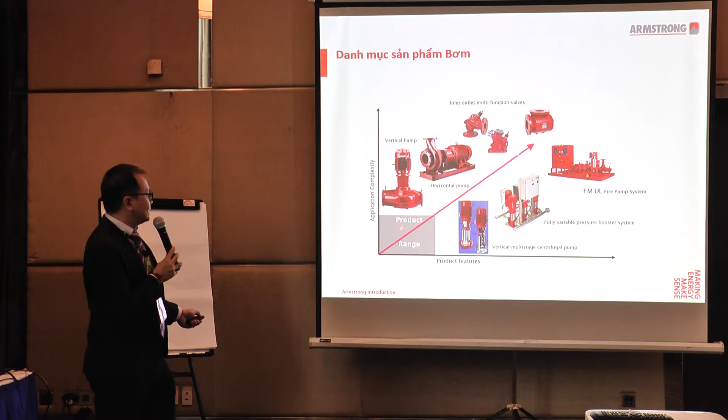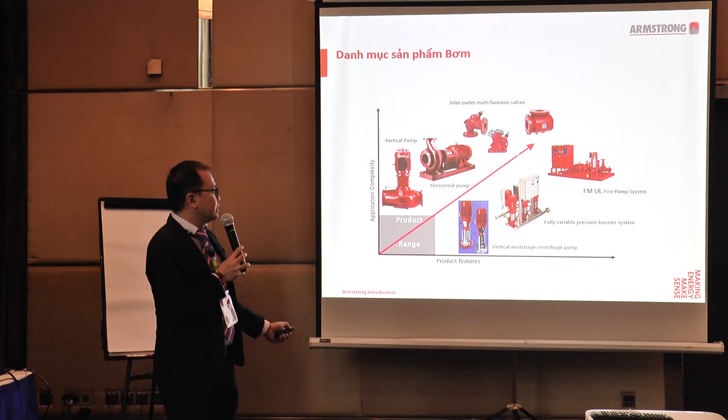So a little overview of our product solutions in terms of the pump portfolio. When we look at our various product ranges, they increase in functionality and capability, from very basic standardized horizontal pumps and suction pumps to vertical inline pumps with accessories such as multifunctional valves and suction guides, and also integration into booster sets, as well as a full system solution.

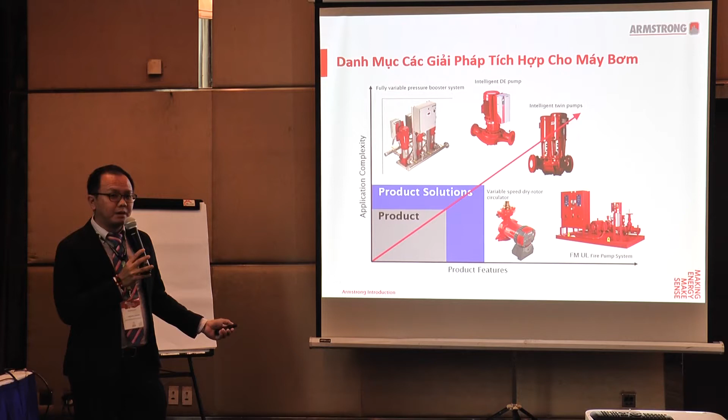So when we talk about integrated solutions, it's not just the mechanical side, which is the pump, but also the control side. You can see we started to integrate the controls, a standalone VFD, which we were able to enhance into what we call Design Envelope. From Design Envelope, we're able to incorporate further with intelligent twin pumps and a full system. So with a product that comes with a solution, naturally we enhance this with the system solution as well.

So when we talk about system, it's really a full solution from the very fundamentals of your mechanical to your electrical and your overall plant control. We can provide you with a more integrated distribution system, as well as chiller control or a full plant room system solution.

So really, this Armstrong portfolio is a journey, providing you with a solution from a product standpoint all the way to full optimization capability. That means an entire plant room system control. With this, you can see how it helps you increase your system efficiency and overall capability.

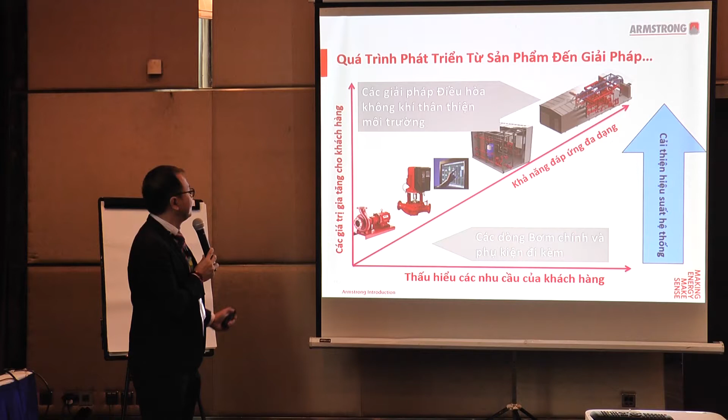So when we talk about our core competencies, of course fluid control is one of them, but also our expertise in HVAC, which is heat transfer, and we are able to couple that with the control system in terms of variable speed and demand-based control, which leads us to provide you with integrated solutions. These integrated solutions range from single, more modular ones to heavily integrated solutions. Essentially, this provides you with optimum building performance management and control.

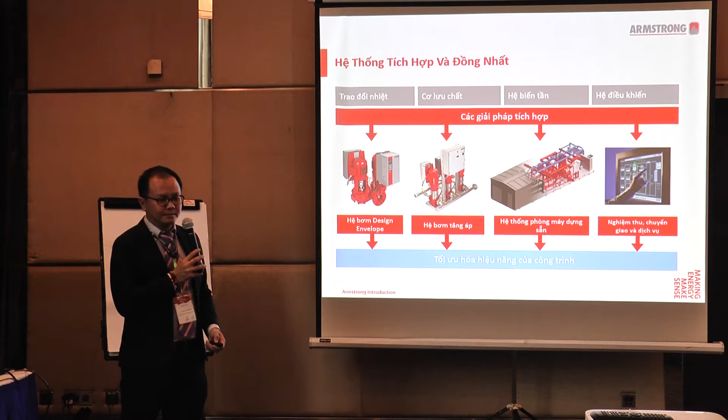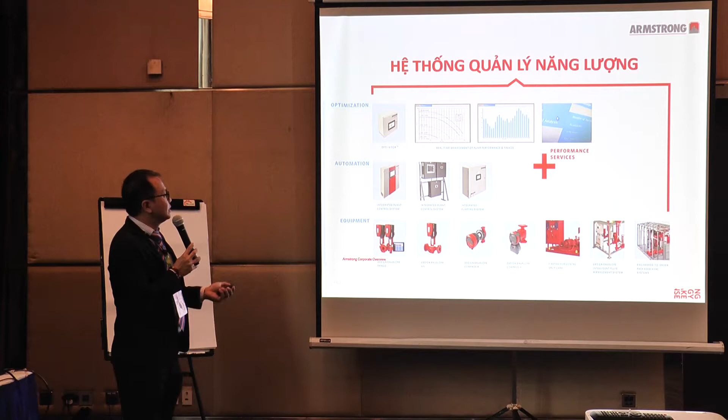So when we really talk about optimal performance management control, we're really talking about optimization. Now, a lot of people will understand, when we talk about plant optimization and also automation-wise, right? It's really about how you are able to first assess your operations on a real-time basis, as well as be able to enhance the performance of your plant. So you want to make sure that not only you're sustaining the performance, but you're actually able to improve as well over time. So this is what we call the performance management.

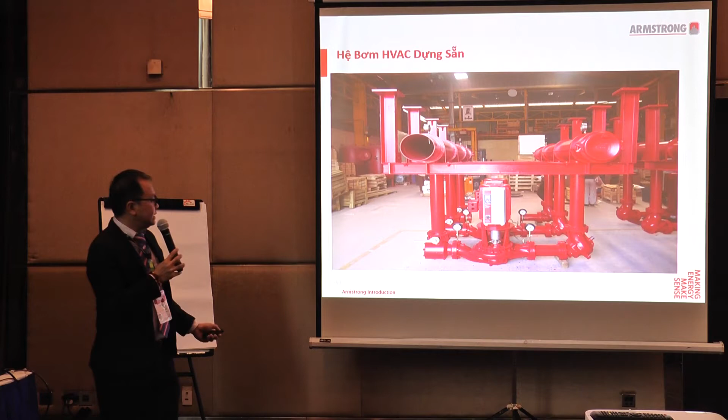So just some pictures to show you the different packages that we offer in terms of the HVAC that you can see here, as well as a big solar power project that we developed for the Middle East. Okay, thank you very much for a quick overview of Armstrong.

Thank you, Mr. Wesley. So next we invite Mr. Chris Han to present about the Armstrong solution. Hi, my name is Chris and I'm in charge of Southeast Asia. So today's topic is on challenging the traditional approach to HVAC system.

So during this section of mine, I hope that you can take down some notes because perhaps there are some new concepts that you will be exposed to, and I hope in my next visits to see you personally, visit you at your office so that we can explore some of these concepts that are going to be shared over the next few slides.

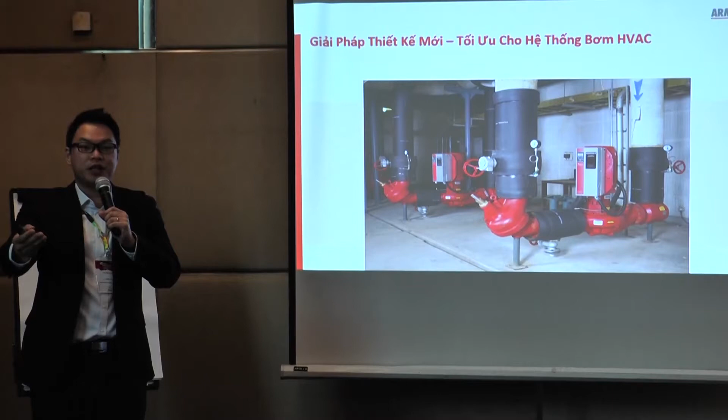Yeah? If you see also on the right hand side here, that is what we call our Design Envelope integrated drive, where we integrate our inverter together with our pump. Within this integrated drive, we do have a flow meter functionality, and this gives you accuracy of ±5% of the BEP flow rate, best efficiency point flow rate. And this is actually much more accurate compared to the flow meters in the market, which are typically around ±10%.

And after you have installed all your equipment, we know that a well-balanced system is very, very important. A well-balanced system is very important because this will actually influence your efficiency, your plant room efficiency, as well as your reduction in operating cost.

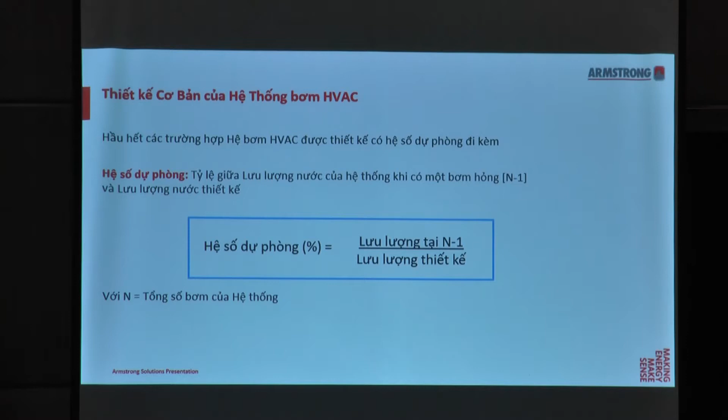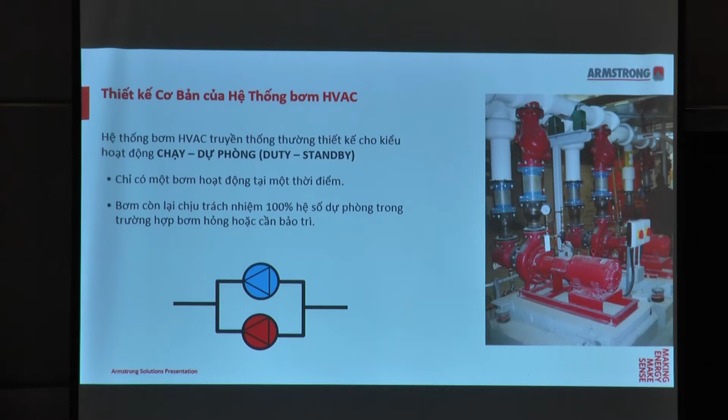And I believe in some of your existing designs, as engineers, consulting engineers or designers, you basically have your pumping system designed as a duty standby. Am I right? As you can see here, this picture looks very familiar to you. You use a traditional end suction pump with one of the pumps operating at one time and the other on standby, giving you 100% redundancy in case of a failure or a maintenance requirement.

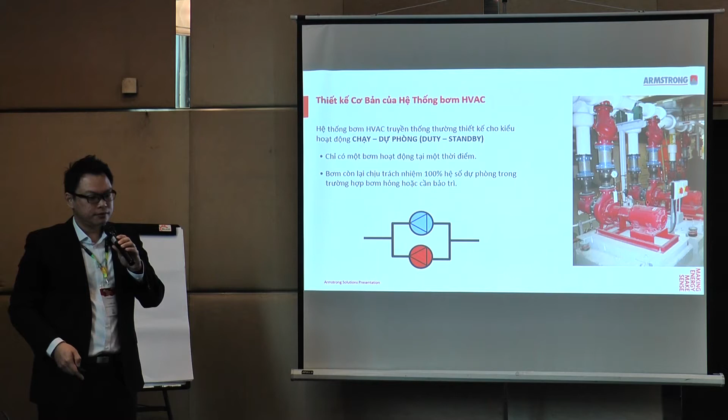The second concept I want to share with you, and again, you would have known, the HVAC industry is basically a part load industry. That means we are not operating at 100% of the design demand at all times of the day. Correct? If you were to do statistics over time, I would say that 90% of the time we are only requiring 60% of the load. So what this means is that when we size our pumps for part load, we can actually select smaller pumps to handle these lower flow requirements.

Follow? So when you have two smaller pumps in operation, and if one pump fails, we'll still have sufficient redundancy or backup, and this backup will be able to handle the flow whenever this failure occurs. And over here in the box, you will see that unlike other equipment like boilers or chillers, the pump's redundancy is not a 1-to-1 ratio. It's not determined by the number of pumps.

A concept that I want to share with you is capacity split, and this becomes useful when there is a multi-pump system. In this case, I'm going to consider two pumps with a design flow of 19 liters per second. If we consider a 50% capacity split with two pumps running, each pump will have 9.5 liters per second. If you have a 2 times 70% capacity split, each pump will have 13.3 liters per second. And what if you size your pump for a 2 by 100% capacity split? That means you have a duty standby configuration, or you can operate in parallel.

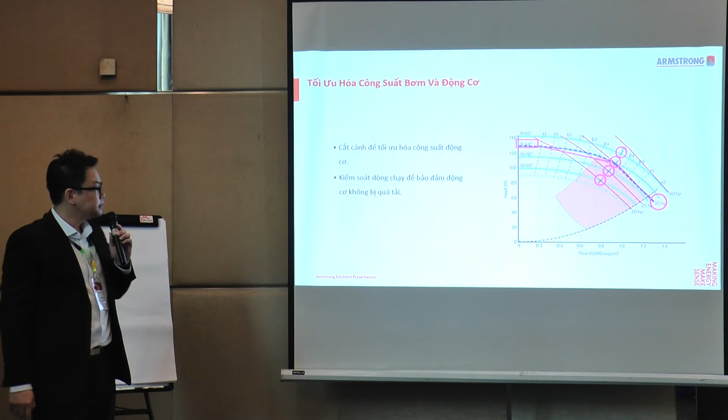Next, this is something you may find interesting, because I believe not all manufacturers use this approach. If you can follow along, on the y-axis I'll choose a point of 90 feet of head, and on the x-axis I'll put it at 900 GPM. So if you follow this graph, basically what you get is at this spot here.

If you see the spot here, if you have a requirement of non-overloading, you'd want to use the 25 horsepower, but your end of curve will exceed the motor horsepower curve. So what do you do? You have to go for the next size, which is 30 horsepower. If you realize, the 30 horsepower intersects the 11.44 inch impeller size.

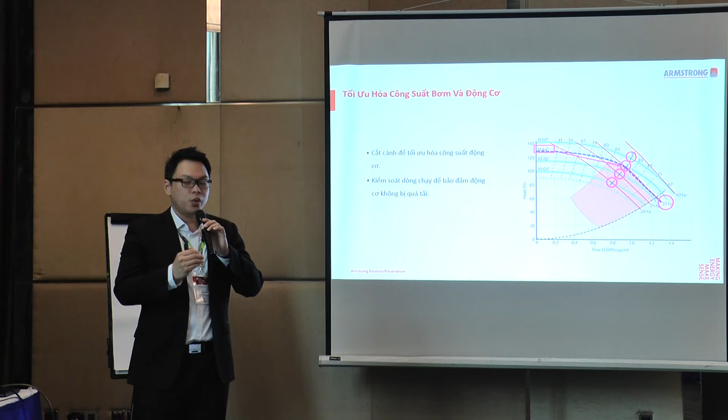So for us at Armstrong, since we're already going to use the 30 horsepower motor, why don't we optimize the impeller trim? Instead of using 10.78 inches, why don't we use 11.44 inches? What does this give us? It increases our operating range available.

So what's different is that our operating portion goes along the head curve, and follows the motor horsepower curve straight down to ensure there is no exceeding of the horsepower curve. So again, the first sentence: impeller trim is optimized to the motor power.

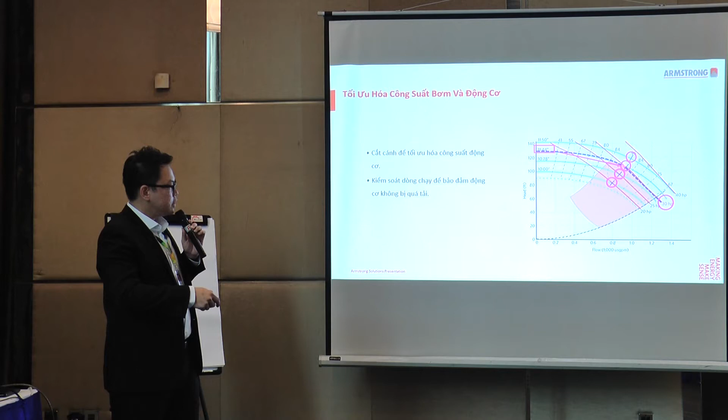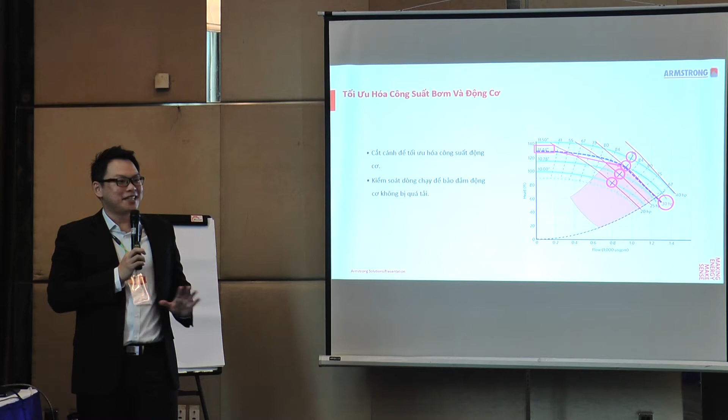So what does this mean? If you realize, these circles indicate where the best efficiency points are for each of the impeller sizes. There's an intersection between the motor curve and the best efficiency point. We ride along this curve downwards, and at this intersection it drives down all the way to the end of the curve. This is what we call electronic load limiting capabilities within our pump, to ensure the motor horsepower is not exceeded. It's a lot of words, but I hope you understand my explanation.

Later on, my colleague Ronnie is going to introduce our Generation 5 pumps, Tango pumps, available up to 10 horsepower. These 10 horsepower motors are equipped with IE5 capabilities, or rather IE5 ready. Right now IE4 is pretty common, and when IE5 becomes more prominent in the market, we already have the solution.

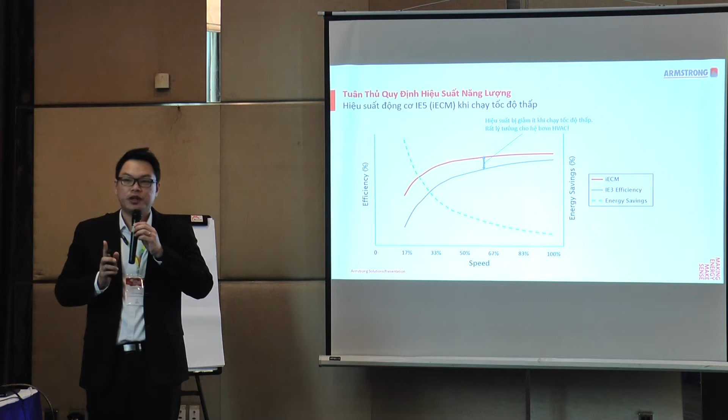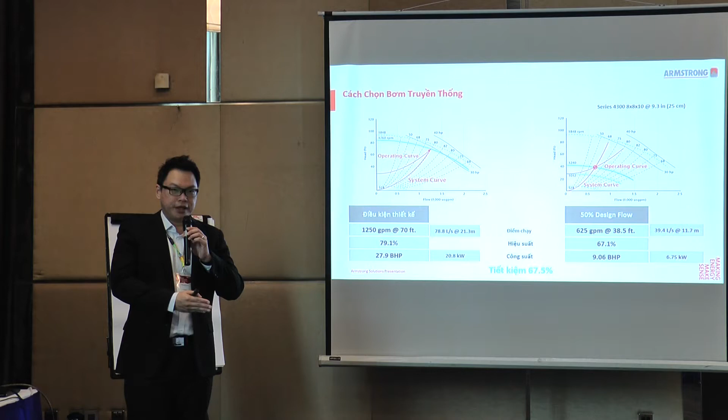Next, another mindset shift for you: traditionally, if you approach a lot of other pump manufacturers, they select a pump that is to the left of the best efficiency point. If you follow this graph on the left-hand side, the best efficiency is around 82, but the operating point is to the left of the BEP. This is at full load, 100%.

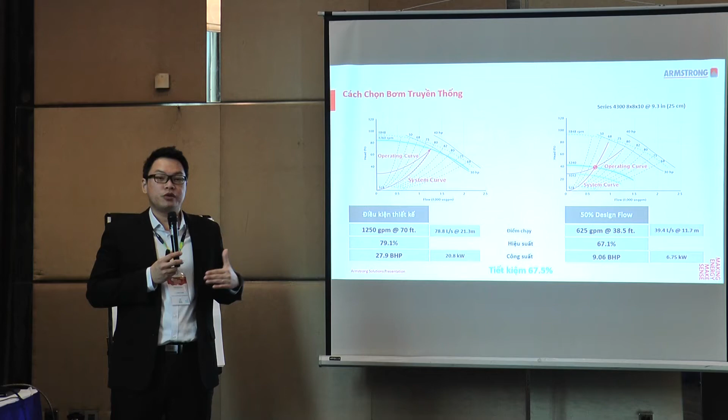Since HVAC is a part-load industry, we drive it down to 50% of the design flow. These are the readings: efficiency is 67.1% with 9.06 brake horsepower. If you do the math, it's about 67.5% energy savings. If you're familiar with ASHRAE standard 90.1, it states that at 50% flow, it has to have 70% energy savings. Since this is 67.5%, it does not meet the requirement.

Because it's below 70%.

Now, what does Armstrong do differently? Again, if you see, the best efficiency over here is at 85%. What we do is we select a point where our duty point is to the right-hand side of the BEP, so even though at 100% our efficiency is 68.1%, we're considering part load.

So let's take a look at part load. Our efficiency increases to 83.2%. And based on this calculation, we are able to achieve an energy savings of 77.5%. Again, this is above the ASHRAE 90.1 requirements of 70% energy savings at 50% design flow.

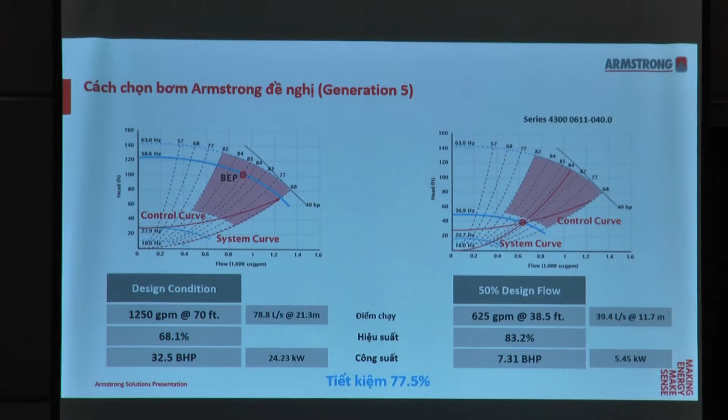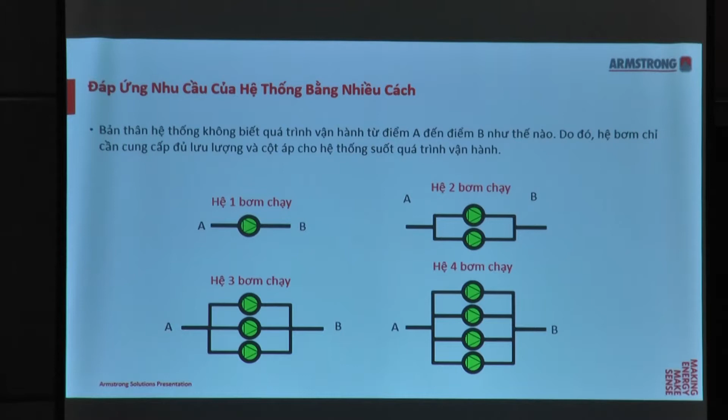Now, because let's consider you are trying to deliver fluid from point A to point B, what these diagrams are trying to say is that so long as you're delivering the right flow and the right head, the system doesn't care how you deliver it or in what kind of configuration. So you can either choose one pump on duty, 2 pumps on duty, 3 pumps on duty, or 4 pumps on duty. Regardless, it still gives you the required head and flow.

And if you were to, just to pick one example, let's say 2 pumps. So 2 pumps, you can have 3 types of combination, right? One is 1 duty, 1 standby, each sized for 100% capacity. Or you can have 2 duty, each sized for 50%. Or you can have 2 duty, each sized for 75% capacity split.

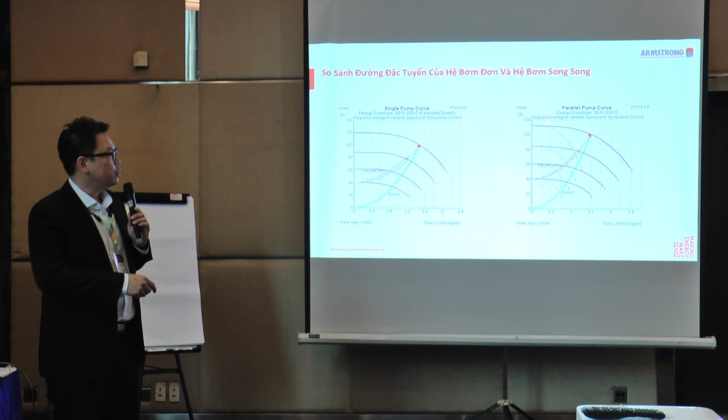And again, this is just some background on how the single pump works. So the graph on the left-hand side is basically a system where 1 pump is designed in operation. And when you design your system with 2 pumps in parallel, this is how it looks like - at every point, capacity doubles up. Also take note that each pump is actually of the same size, and whenever you reduce it to single pumps, you still have to intersect the system curve.

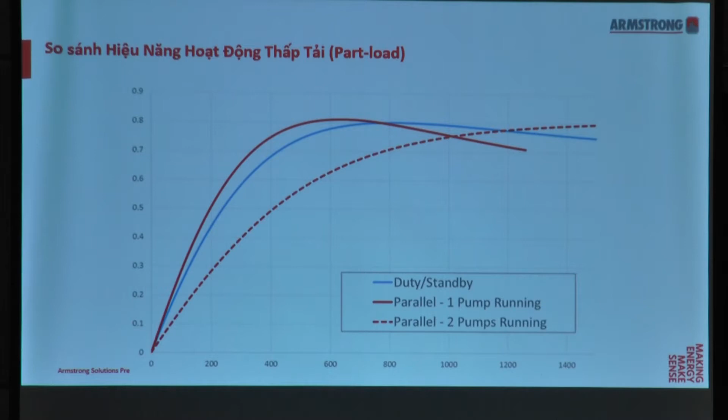So this is again what is turn down. Turn down is the percentage of design flow at which the flow becomes stable and is able to be accurately measured.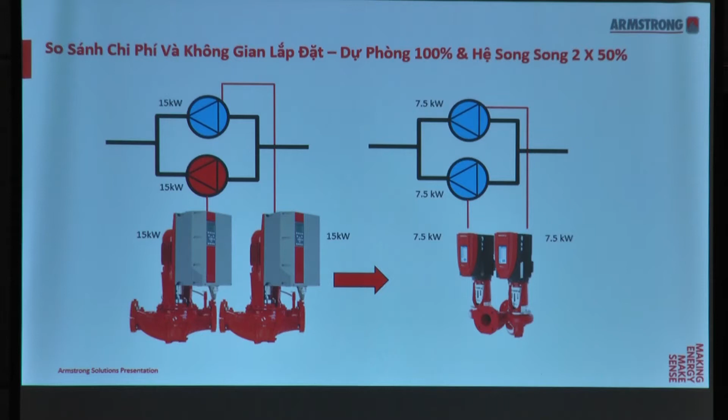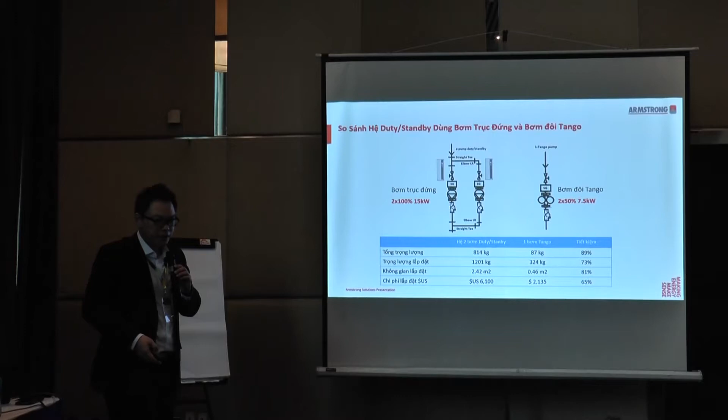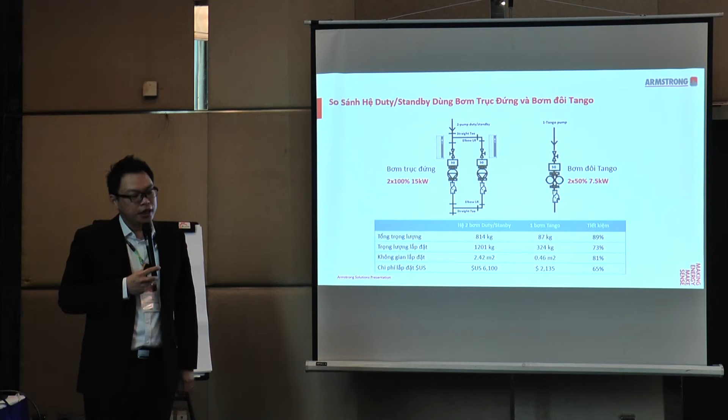So you see the diagram on the left, against our Tango pumps. The table here basically shares with you some of the comparison. In terms of weight, we have saved about 73% installation weight. Footprint, we have reduced by 81%. Of course, installed cost, we have brought it down, saved about 65%.

And besides that, we also have this pump called the twin pump. Twin pump is actually just slightly more flow and more head in terms of operating range. But again, when we compare a twin pump, our own twin pump, versus the Tango pump, there's also cost savings as well as installation weight savings. So what we're trying to do is, even within our own product portfolio, we're trying to outdo our own products to ensure that we always stay forefront of technology, forefront of cost savings, as well as lowering operating costs.

Within our Tango pumps, this is called Tango. Why is it called Tango? If you will see, this is actually 2 motors with integrated drive, or VSD, and there's only 1 casing. What is interesting is that there's 2 impellers in 1 casing. This is good because, again, there's all the benefits you have learned earlier. For example, redundancy is there, and also when it comes to maintenance, you can just use a blanking plate to blank off one side, maintain it, while the other still continues to run. So there is no complete shutdown.

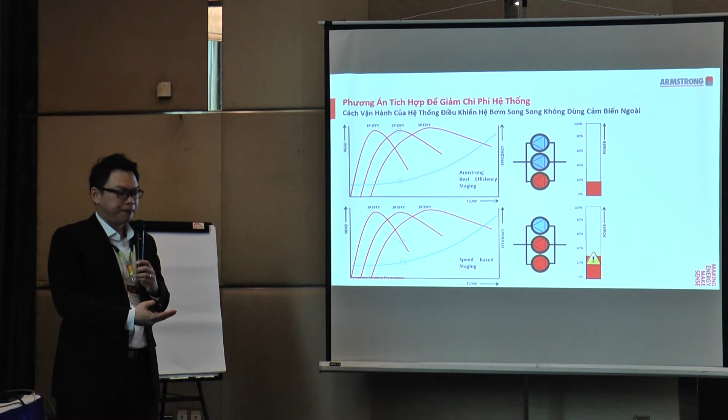So at the start, yes, there is movement. At this juncture here, you will realize that we start to turn on the second pump. But the traditional speed-based BAS control is still operating on the single pump, right? It is going to perhaps run until 90 to 95% of the maximum speed.

So even though we are already turning on 2 pumps, compared to the speed-based scenario we are only consuming 18% of the power. However, with the speed-based control, you're already consuming 30% of the power. So this means that in terms of operating cost, our best efficiency staging methodology helps your owners or your clients save money.

And here you will notice there is this warning sign. So I'm going to put this warning sign at this point on the graph. So these are the points at the intersection of the first and second pumps' efficiency graph. This is where it's going to turn on. Right now, as you can see, while we are already at our 3rd pump turning on, the speed-based pump is still only at the 2nd pump.

Of course, at the end, when it reaches all the way to the end, our power consumption is the same, right? So the greatest advantage we have is what happens in between: how our methodology turns on the next pump compared to the traditional speed-based approach. Later I'm going to show you what those warning signs mean.

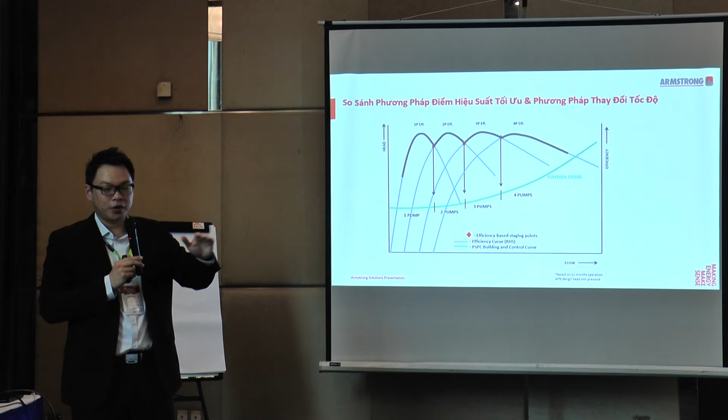Based on that graph, you realize that speed-based control would go all the way to almost 90 to 95% of the maximum speed before it turns on the next pump. So it's going to stage on the next pump at 95% of the speed, and stage off at 55% of the speed.

So if I were to do shading over here: this diamond point is where Armstrong's approach stages on the next pump. This cross here is where the traditional speed-based approach will turn on the pump. So these black areas here, 1, 2, 3, represent the loss of efficiency due to late staging on of the next pump. Efficiency in the plant room is very critical for the overall building performance.

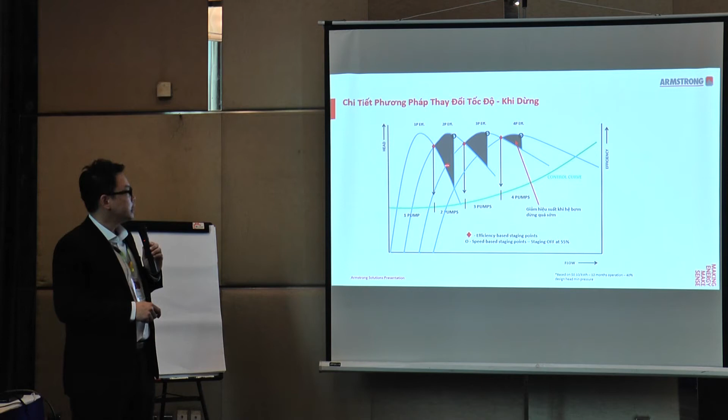Next, of course, when it comes to staging off, it is staging off too early. And this shaded area will show you the loss of efficiency due to staging off too early.

But at the same time, if you use the Armstrong solution or methodology, it's going to give your clients better efficiency readings. So we say there's 30% energy savings from best efficiency staging.

Okay, so now when it comes to what is design envelope and how is it different from our competitors: I believe a lot of designs are a pump with a separate wall-mounted VSD with a DP sensor somewhere in your system. Just now we talked about 3 scenarios, whether it is the furthest away load, 2/3 of the way, or even in your mechanical room.

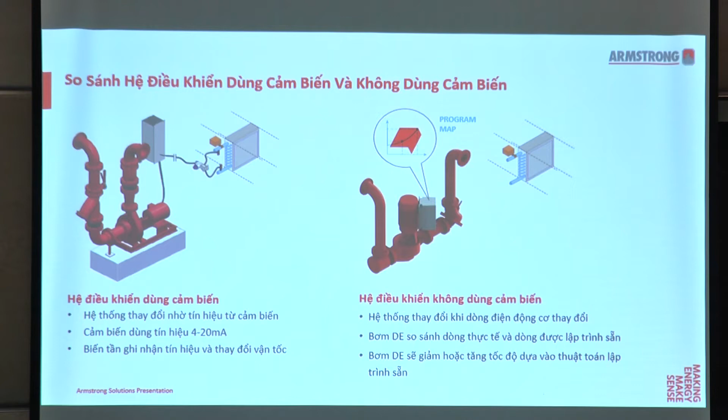But for us, as I mentioned, our product has an integrated drive with all our embedded information. The 4 parameters that we embed into our drive are power and speed, flow and head. So a change in the system is read by a change in the power drawn of the motor.

So what happens is that our pump will compare the power drawn against the data that is already included in the pump, and that is where you will know and read the head and flow that it's operating at. And of course it will have the speed modulating function based on the readings as well.

So our integrated controls have a function of two-way bypass valve control. It is also able to have minimum flow control, maximum flow control, as well as two-zone control capabilities. And our flow meter is all embedded into our drive.

So just to recap, if we consider what your designs are now, basically two end suction pumps with wall-mounted drives with an external DP sensor. And I introduced to you our design envelope pumps, which are vertical inline with integrated drives. And the last one, our Tango pumps, which are currently available up to 10 horsepower.

Some of the advantages when you use two vertical inline pumps: one is reduced installed power, provided you have properly sized the pump; integrated controls, sensorless technology, high level of redundancy, and low space requirement. And if we go on to the next solution, Tango, again you have reduced installed power, super efficient ECM motors, sensorless technology, high level of redundancy, and lower space requirement.

So as we can see, our products over the years have innovated and progressed, giving a lot of advantages back to the customers. What we're trying to do with all our products is two main things: one is to give the lowest installed cost, benefiting the contractors, and of course lower operating costs, giving benefit to the owners.

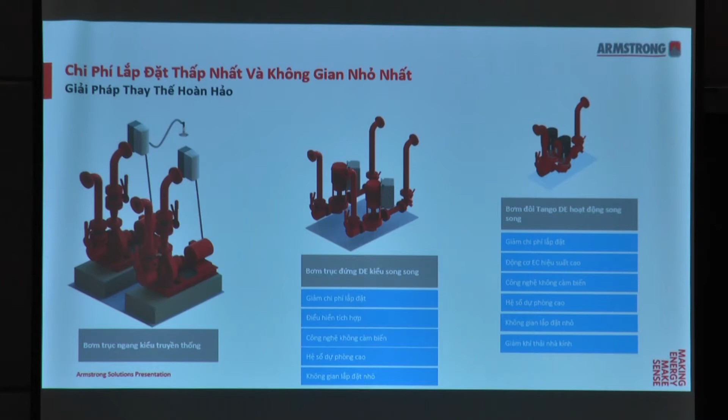Now I believe you have designed a lot of plant rooms for different applications. Let's look at the first one on the left-hand side. We call it the generic duty. It means you're designing perhaps for schools, apartments, condos, and maybe factories. We propose you consider a 2 by 50% capacity split, thereby giving you 70% flow redundancy.

Next, if you're designing for high comfort sensitivity, such as hotels, offices, universities, or campuses, you can consider a 2 by 70% capacity split, giving you 85% flow redundancy. And lastly, mission critical, meaning you must have 100% redundancy available. We're talking about hospitals, blood banks, or even data centers. For this we propose a 2 by 100% capacity split with 100% flow redundancy.

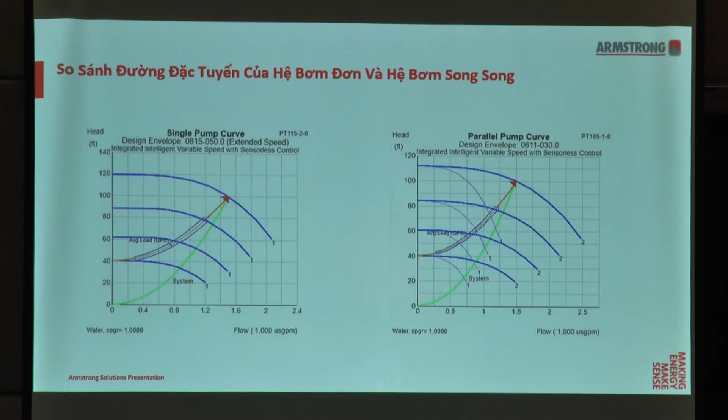Not double. For one pump and two or three or four pumps, it can differ because our piping doesn't change. But when we run more pumps, the flow rate goes up, and the head of the system also changes. So the curve of the system will change when we run one or two or three pumps. So you're trying to say that the system resistance curve will change when we add more pumps.

Okay, so for now, I'll just briefly go over three case studies that we have done in India. We'll go through an overview of how we offer the best solutions for different types of applications, ranging from hospitals to cinemas as well as commercial buildings, IT buildings essentially. I will start off with the first one, the Amrita Hospital, located in Delhi. This is where we helped create the solution for the customer using a tool called DEVA, Design Envelope Value Application.

A little bit about the background: Amrita Hospital is a research campus that consists of five buildings: hospital, research block, convention center, medical college, and auditorium. These five blocks will already be commissioned this year. Originally, when this project was designed, it was supposed to consist of 1,000 tons of ten chiller systems. So we have six counterflow chillers and four normal chillers, which consist of three duty and one standby.

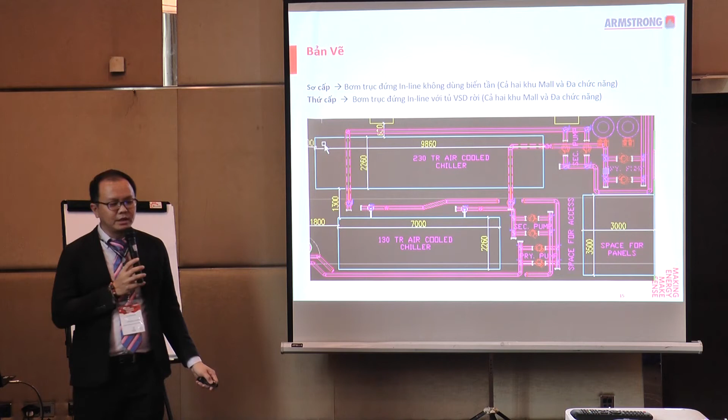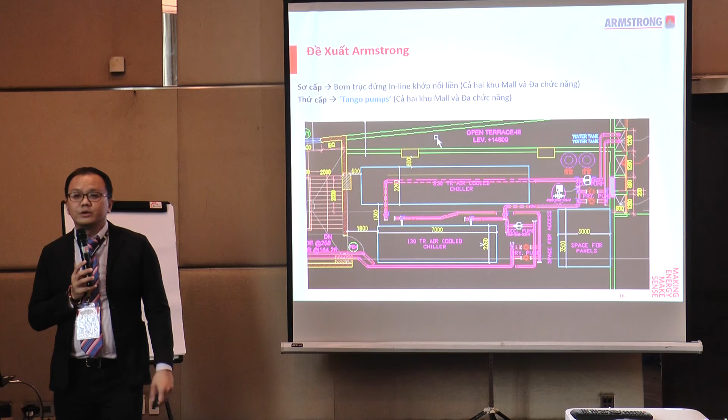But regardless, with our pump Tango, we can actually offer running at 50% capacity because after all, it's running parallel operation. So the drawing originally, this is what it looks like for the primary and secondary base. You can see the multiple vertical inline pumps with the loose attached VFD as well. And then what Armstrong proposed is basically changing the secondary to a Tango pump. So for both the mall and the multiplex area, the Tango pump essentially helps to reduce a lot of the footprint involved, as well as the space savings.

But not only that, you can also tell your customer, after that initial payback, you're going to continue to have all these savings year after year. Compared to if you actually accepted a much lower bid, your savings may not be able to generate that much for your entire pump life cycle. So that is the one thing that we want to show, whether you have your payback immediately or within the 1-2 year time frame.

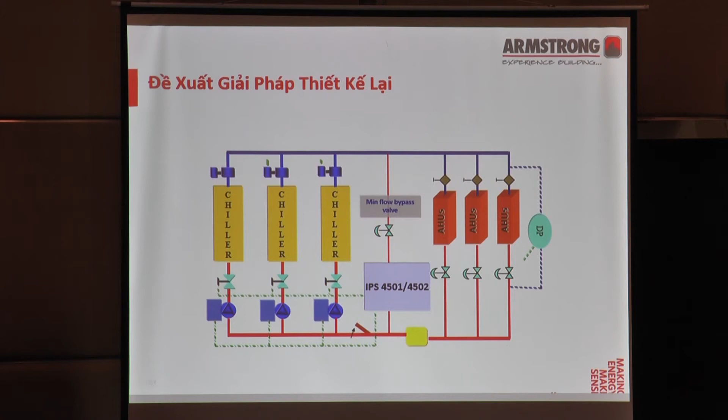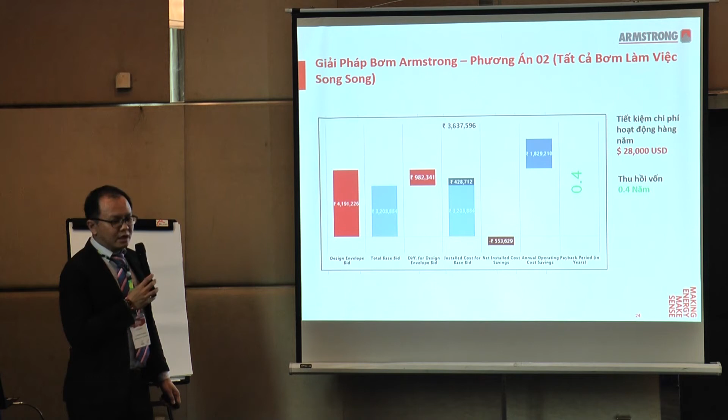So what we want to show you is exactly what this data looks like. It's basically nothing more than just a spreadsheet that compares numbers. So from an engineering standpoint, we show you the differences in the pumps for the power rating, and then go on to the next one.

This is where the original saving comes in. We pull the numbers and do the calculation, which actually shows that they can get savings in less than a year. Although originally it costs a bit more, your annual operating cost saving itself is already more than half. About half. So your 10-year savings is actually quite high, because that is where the projected lifespan of this retrofit comes in.

And then go to the next. So similarly, whether you're looking from a contractor standpoint or from an owner standpoint, we can actually deduct the same kind of comparison. So really, we want to see the savings whether from a contractor who is doing the installation, or the owner who is running this operation for 10 years.

Okay, that's it. Any questions? Just a very quick one before we go into our main product.

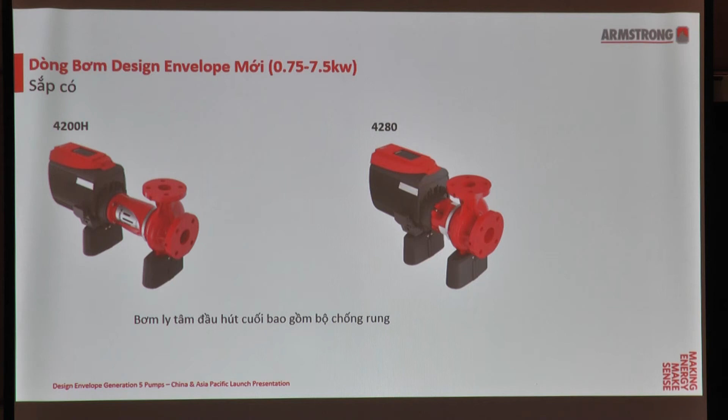Now let's look at the new models for our new generation DE pumps. Above you can see the Tango pumps with a new series. Here is our Tango pump, and this Tango pump with our closed cover. And here is a DE-VIL with new generation 5, and this DE-VIL with a closed cover. And all of these with our new generation 5, the ratings will carry from 1 horsepower to 10 horsepower. And for the end suction, DE will be coming soon, this is under development and will be coming soon.

Okay, now let's look at the product range overview for our new upgrades. For the ratings from 1 horsepower to 10 horsepower, this will be succeeded by our new Tango pumps. And for those above 10 horsepower, it will stay as before, but the pumps and also the inverters will remain the same as our generation 3, while the pump managers and the DE technologies will be generation 5.

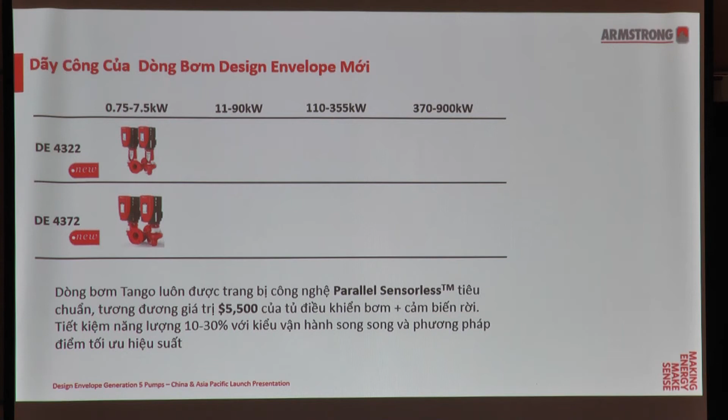Here you can see for these power ratings, we will be succeeded by our generation 5 pumps. These pumps will use our DEPM motors. DEPM means design envelope permanent magnetic motors with IE5 motor efficiency. And for those above 10 horsepower, such as DE-VIL, this would be this type, and we also have the DEPC card for this. This is the newest upgrade, also for those larger sizes.

And for those Gen 3 pumps who want to upgrade to Gen 5, we can use our retrofit kits with the DEPC card to upgrade the Gen 3 pumps to our Gen 5 pumps.

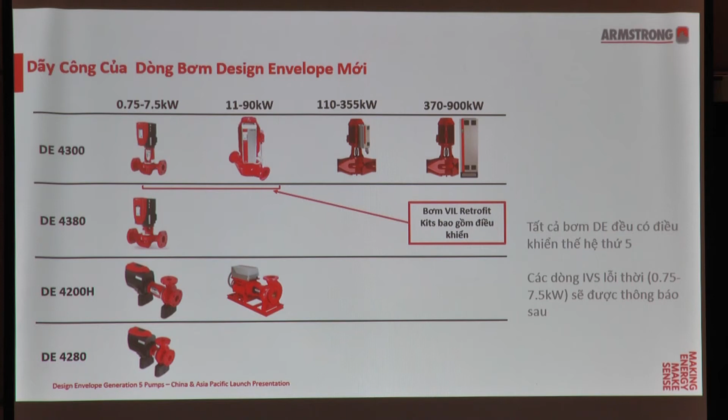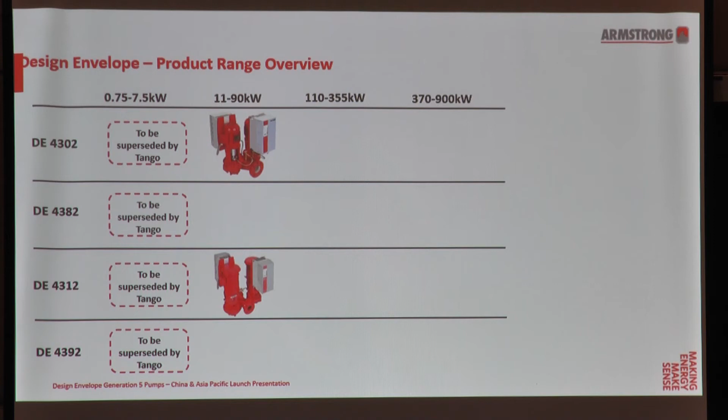Yes, we can see our twin pumps and our dual pumps. Twin means one duty and one standby. Dual pump means two duties. These ratings will be succeeded by our Tango pumps, and for those, it will stay the same as before. For the Tango pumps, two pumps, and also 3 and 4 pumps in parallel, the parallel sensorless control will be embedded in our Gen 5. For those with above 5 pumps in parallel, additional control panels like the IPC will be required to control the pump groups.

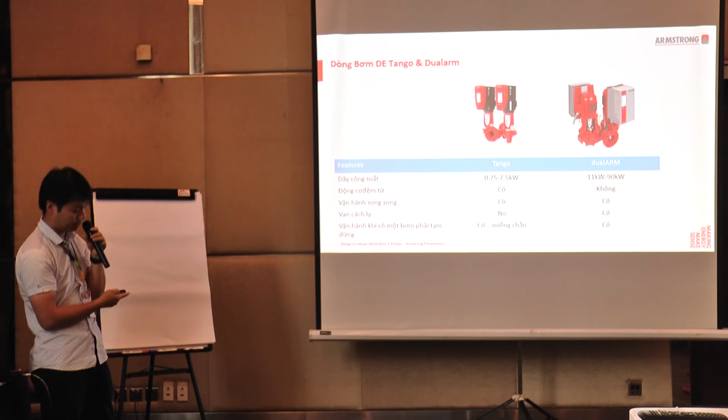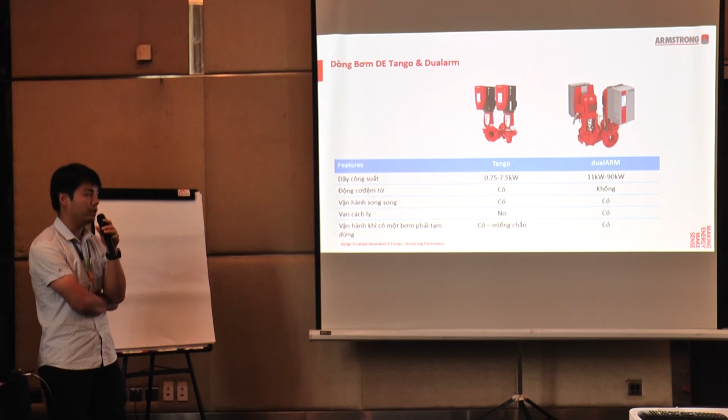This introduces our Tango pumps and also the dual arm pumps with different power kilowatt ratings. For those below 10 horsepower, we can use our Tangos, and those above, we can use dual arms. For the below Tango pumps, it is permanent magnetic motors embedded like this. But for the dual arms, it is not available because of the limit of the permanent magnetic motor.

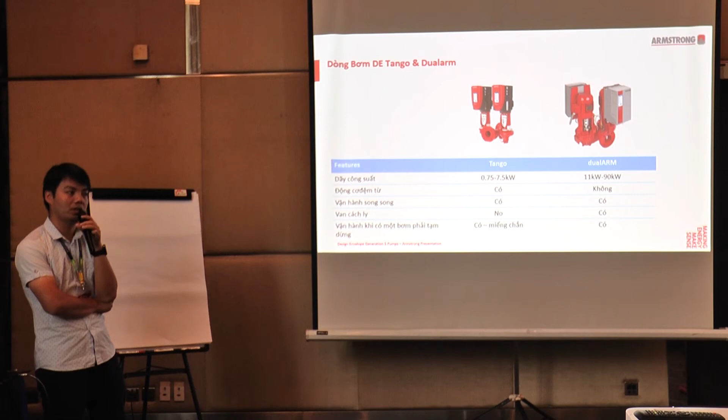Now let's look at the benefits for our new generation 5 pumps. First is low space requirements, because 2 pumps are in one casing. The second is pipe mounted. There is no base required for the Gen 5 pumps, and also we can mitigate the risk for the pumps.

Such as we can reduce the downtime, if one head of the pumps has a failure, we can use a blanking plate to service this pump.

And the lowest installation cost, and we can use our DEPM permanent magnetic motors, with our parallel sensorless technology. And also the lowest operation cost. We have optimized our control integrations with our Gen 5 pumps, and also the best efficient stage sequences embedded in our inverters.

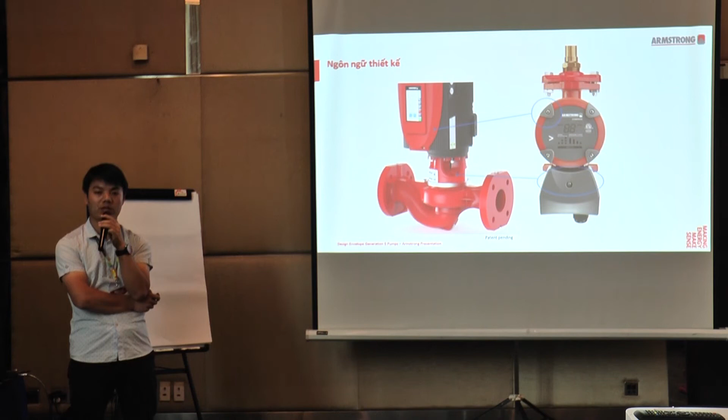Okay, now let's look at the new design for the clamp ring design. This clamp ring design is engineered for clamps and used in many fluid applications. This design can bear much higher temperature and also higher pressures. It can be used in air-operated pumps and sanitary pumps and so on. This also allows for the streamlined casing design and quick serviceability of close-coupled pumps.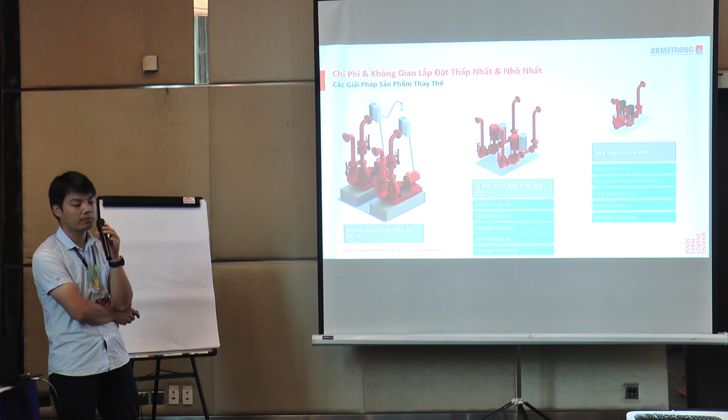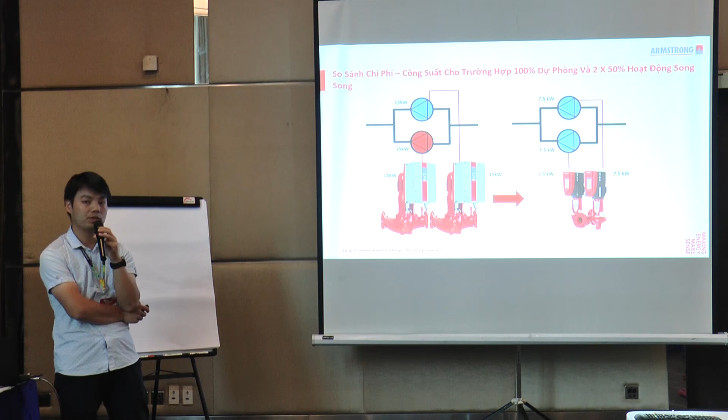Here shows the duty standby design compared to our 50% redundancy in parallel design. The left shows the motor and selection would be larger, but the right hand shows it can be selected as smaller.

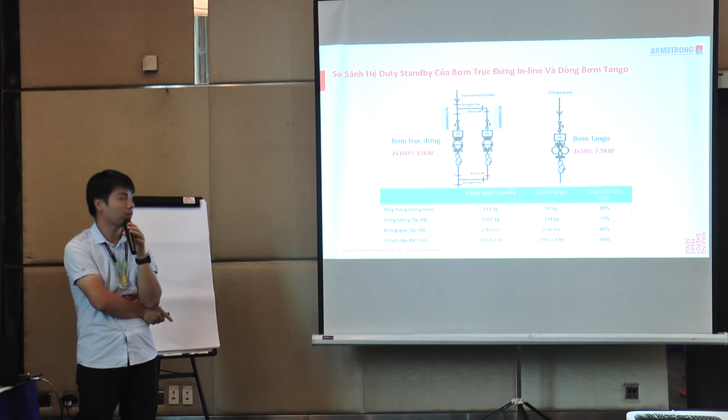This shows the Tango pumps compared to our twins. Twins means one duty and one standby. Comparing our Tango pump to the twins, we have much improvement in these different sections.

Now let's look at the newest DEPM motors, meaning design envelope permanent magnetic motors. This motor has a 4.3-inch colorful touch screen, and for efficiency it can meet the European IE5 standards.

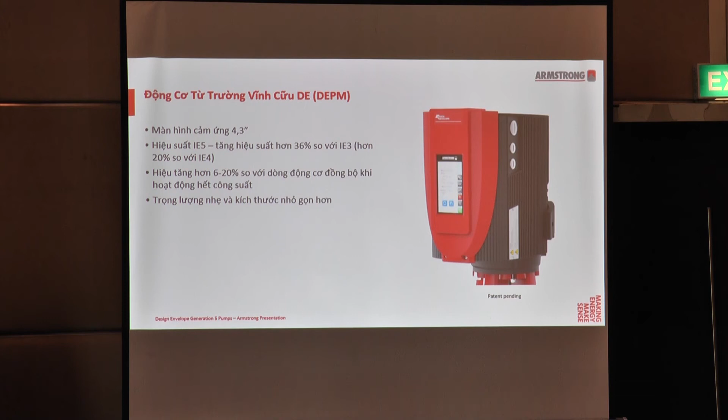This would be about 36% higher than IE3. Compared to traditional induction motors with separated inverter installations, the efficiency improvement is about 6 to 20%.

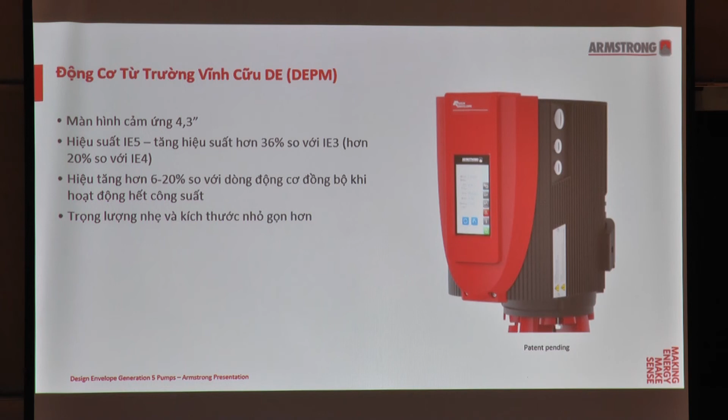We also have the possibility to reduce the weight and physical size. This is a comparison for 4 kilowatt induction motors plus IVS inverter compared to the DEPM motors. You can see this is 68 kilograms, but for DEPM it's only 18 kilograms.

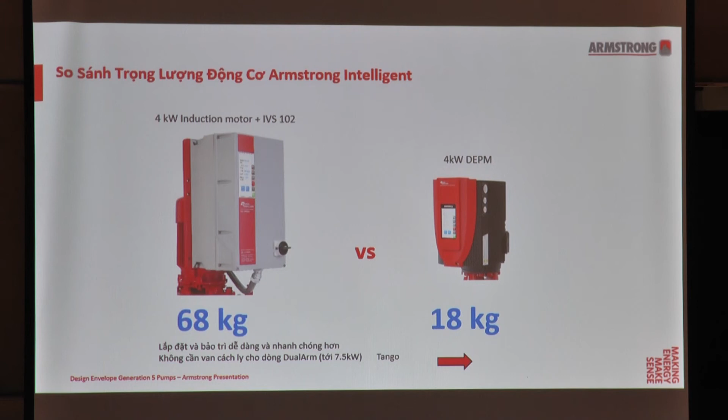For this activation service, we can activate functions like the energy performance bundle and protection bundles. This protection bundle includes the minimum flow protection, maximum flow protection, and also a zone optimization bundle, dual season setup, and so on. For the dual season setup, it has benefit for pumps used in winter and summer, with a 2 season setup.

Also pump manager is available. Here shows the trend curve for flow and some pump configurations. We can configure the pumps through the pump control and also activate the service.

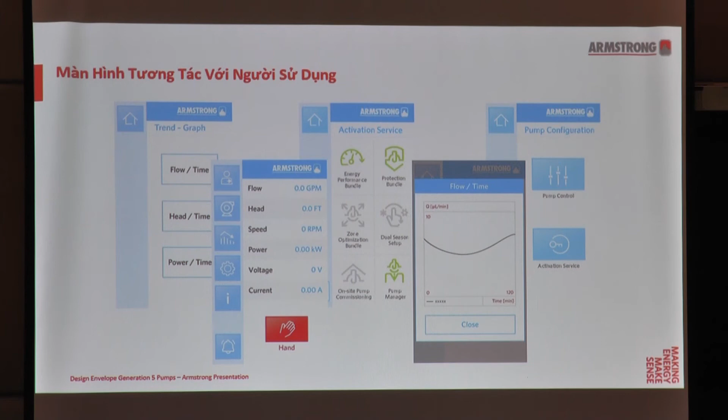We can see this touch screen, and configure all the parameters through it. We can also configure and set up the parameters via your cell phone or desktop on the job site. If connected to the internet, it can also be done remotely. Later we will demonstrate these functions.

Here is the active performance management, the pump manager, and we will do a demonstration for this. Firstly, I'd like to introduce the benefit of this pump manager. First, this is cloud-based - all of the data will be stored in the cloud, and this data is analyzed with industry-specific and pump-specific insights. It also provides higher reliability and sustained optimal performance.

Here we will do the demonstration for these pump managers first. So now let's log in to the pump manager.

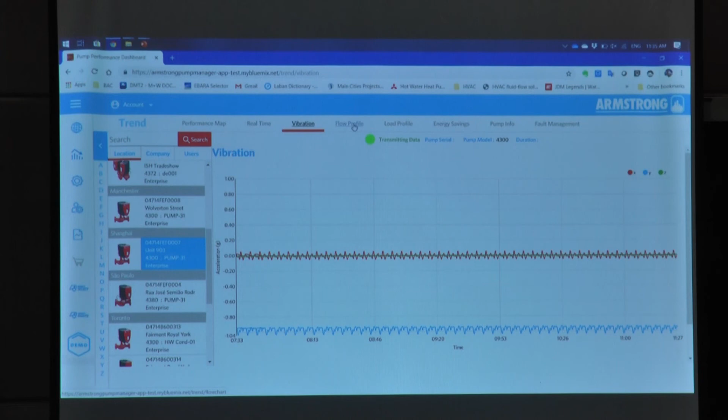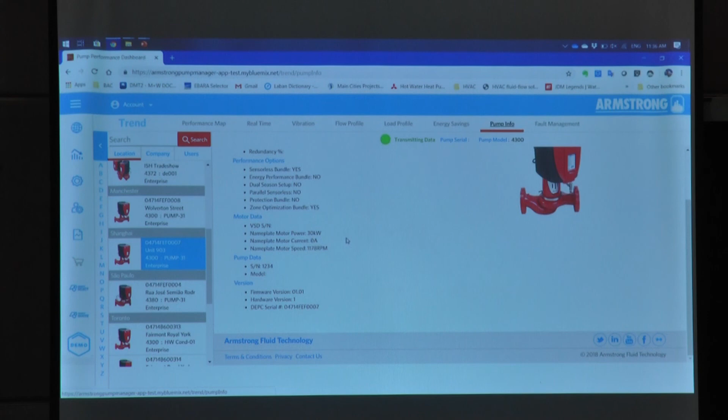And here shows the flow profile, load profile, and the energy savings. Here is the pump information. This is fault management. So now let's look at the left side.

Those that flash mean there are some warnings or alarms. Those that are gray flashing mean the pump unit is offline. This one is normal running. Now let's look at the trend. Yeah, it's just what we talked about.

And the settings. So we can set the pumps, some contact information, and so on, and also some general settings. Yeah, general. And now let's look at the admin. In admin you can pick one.

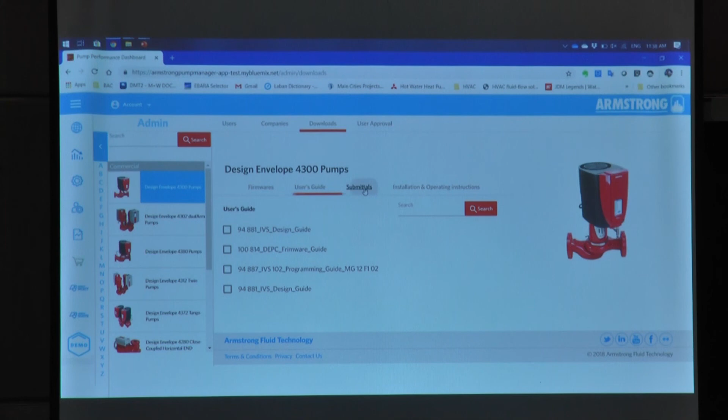You can set up the users, the companies, and also another function for the download. You can pick one pump you want and then download the report and the data you need. This is firmware, the version, the user guide, and submittals and I&O manuals. This is user approval.

Now let's look at this report, such as the one we just picked here, right? Then the report is available for download. You can download it month by month, such as for June. You can click here.

So the report looks like this. It has the summaries of the pump, such as the hourly flow profile, the monthly flow profile, and so on. And this shows the energy savings. Yeah. Here is what the report shows.

And besides the individual pump reports, we have the raw data. It is also available on the pump manager. You can see all of the parameters, the head, the flow, power, and so on. So this is the demonstration for our pump manager.

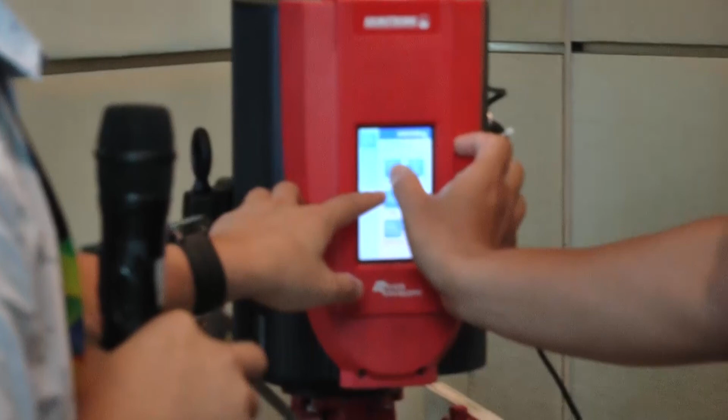And then you need to set up the... you mean the unit can be set up here. The unit, for example, flow, pressure. Squeeze. So we can... yeah, it's okay. And the flow will be indicated, or we can set up. Here is the design for operation work. You mean the duty point, right?

Yes. The pump information. If you want to connect your cell phone to these pumps, the first step you need to set up is the Wi-Fi connection, because this is ready for access. You need to put the mode to the access point. Then we talk about these sessions.

The first one is the energy savings. It will achieve 65% savings compared to induction motors with IE3 and separate VFD installations. The second one, we introduced our sensorless tango pump with the sensorless technology embedded. And the third one, we introduced the redundancy concept. So we can say goodbye to the duty standby concept, and say hello to the redundancy concept for the new design.

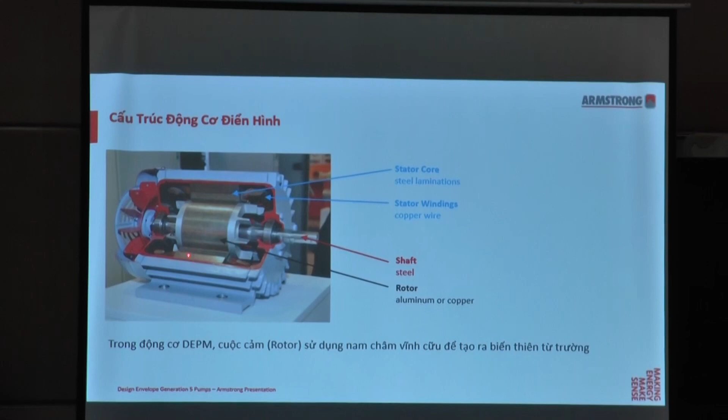Here shows the exploded drawing for the motors. Here is the permanent magnet motor we can see. Here is the rotor with a permanent magnet, and this can generate the magnetic flux and eliminate the windage.

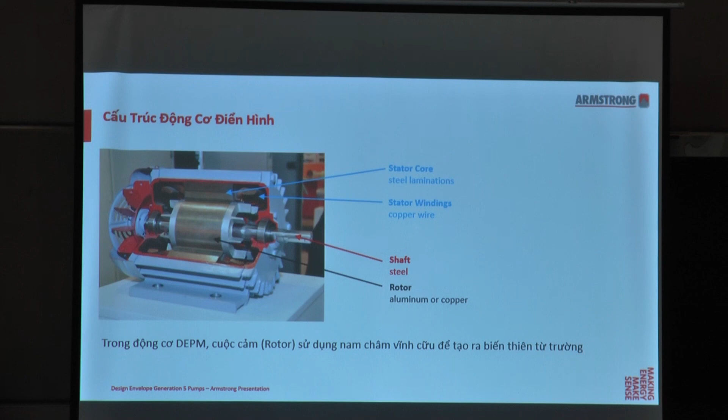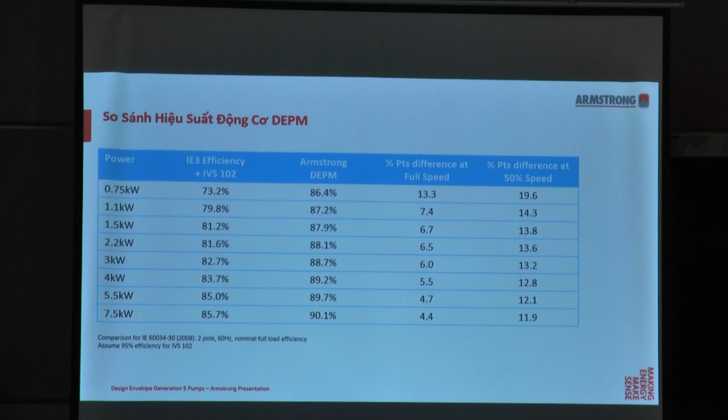And for our DEPM efficiency comparisons, here is the IE3 efficiency induction motor plus the IVS inverter, and here is the power rating. Here is the Armstrong DEPM motor. At full speed, we can see the improvement is lower. But at part load, such as 50% speed, it will achieve much higher efficiency improvements. So this shows that at part load, it will be more beneficial for the DEPM offerings.

And here shows the induction motors compared to the permanent magnet motors. For the induction motor, it has 2 pole, 6 pole, 4 pole, and so on. But for the DEPM motors, there are no traditional poles for such motors. It only has the operation speed you need to operate. For the operating frequency, induction has 50 Hertz, 60 Hertz. But the DEPM can run at 240 Hertz and even 400 Hertz.

So with this higher speed, we can reduce the torque. This is significant for the DEPM permanent magnet motors. And also for the frame size, typically it can be selected as 1 or 2 frame sizes smaller. Okay.